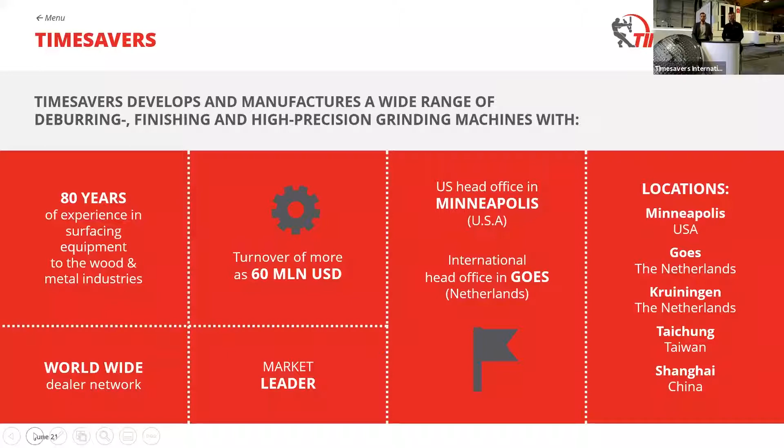A turnover of about 60 million US dollars with our head office in Minneapolis. Our international head office, which I'm responsible for, is in Goes. We have locations in Minneapolis, in Goes in the Netherlands, in Kruiningen, where this machine is built. We build all our special machines in a separate location. In Taichung in Taiwan, and we have a sales office in Shanghai. We work with a worldwide dealer network, and we are the market leader in the total range of deburring, finishing, and precision grinding.

Well, what makes Timesavers unique? We have a complete development and production in-house, a broad range of machines with many applications. We have passionate people, and you can see that over here. We are over here at our customer, so we think global, but we act local. Worldwide dealer network, and we can really build for the customer need. So here you see our network, where we are more or less. If you look at Goes on the world map, Rijssen is, I think, close by.

But Van Geenen. Yeah, we started in 1977. My dad started together with my granddad, and now I'm here. I took it over 5-6 years back. I've already been working here for 10 years. We try to do the things we do better every day. We develop our employees, our machines. During the years, we expanded in the square meters we have now, in new machines, and we have approximately 35 employees.

We started in 1977 with the traditional way of polishing and grinding with hand machines. And during the years, we expanded more into machines with wide belt grinding machines. One of the first machines was a Timesavers, and we bought and developed techniques and long belt grinding machines, polishing machines. So we can polish sheets in diverse levels from mirror 7 to mirror 8 and 9, 10. It's something we developed ourselves.

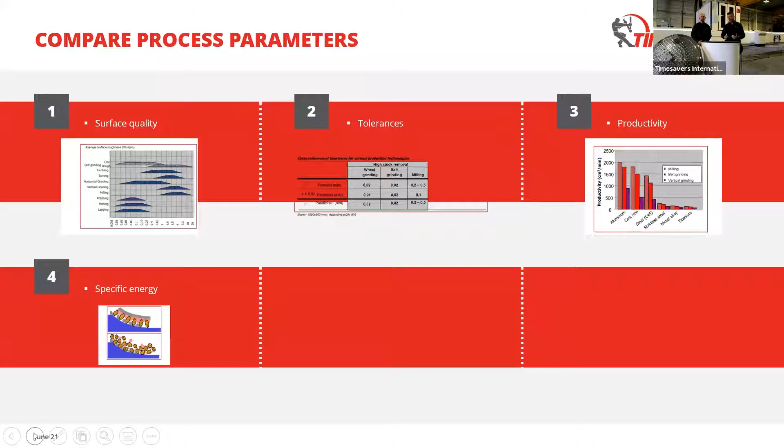Yeah, so like I said, we have milling, grinding, stone grinding, and we will do a comparison now. So that is what we want to show you. Where does a wide belt grinder fit in this area of the milling and the stone grinding? So what process parameters will we compare? We will look at surface quality, tolerances, productivity, and specific energy. I will talk you through it, and later on, when we talk a little bit more in detail, Pascal will join in. So don't worry, you don't have to listen to me all the time.

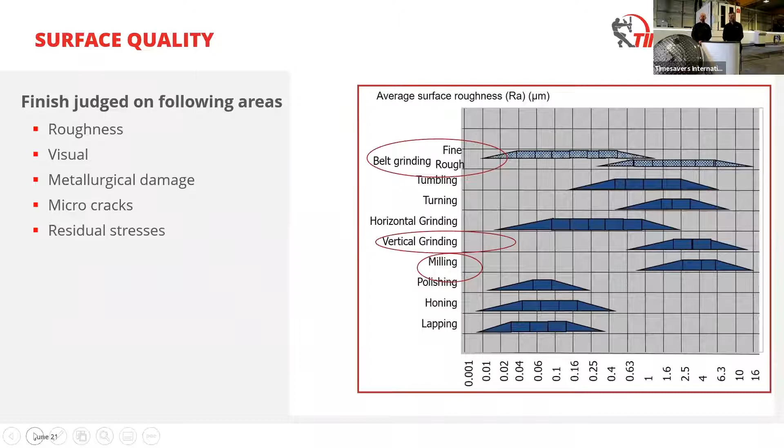So if you see over here, we have the roughness, the visual, metallurgic damage, micro cracks, and residual stresses. That is quite important in our machine. We have a cold process. What you see with the belt grinding, the rough grinding, we will be somewhere with a roughness value up to 0.6. But if we do fine grinding, we can reach lower roughness values. Pascal and I did it a couple of weeks ago with one customer. We had a roughness value of 0.04, 0.05. Still doable with the grinding belt.

If you compare that to vertical grinding, you see that roughness is around 1, and milling is also a roughness around 1. The other disadvantage of milling is that if you have a big mill, you always go under an angle, so you will lose your tolerance, and we will see that a little bit later on.

So here you see the tolerances. Well, wheel grinding, I think everybody knows that is the most accurate way of doing it. Not always necessary, but wheel grinding gets the most accurate one. If you look at milling, you will have a tolerance of about 0.1, and you also bring a lot of stress into the material. If you look at our wide belt grinder, we will have a tolerance of about plus or minus 0.02. It depends a little bit on your starting point and your material, but that's the same, of course, with wheel grinding.

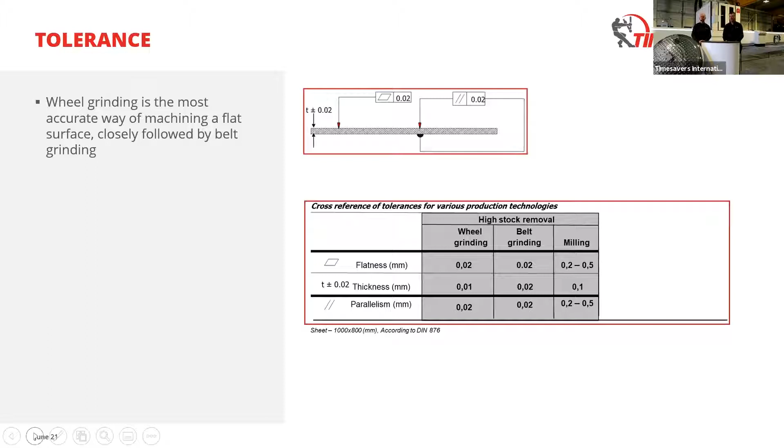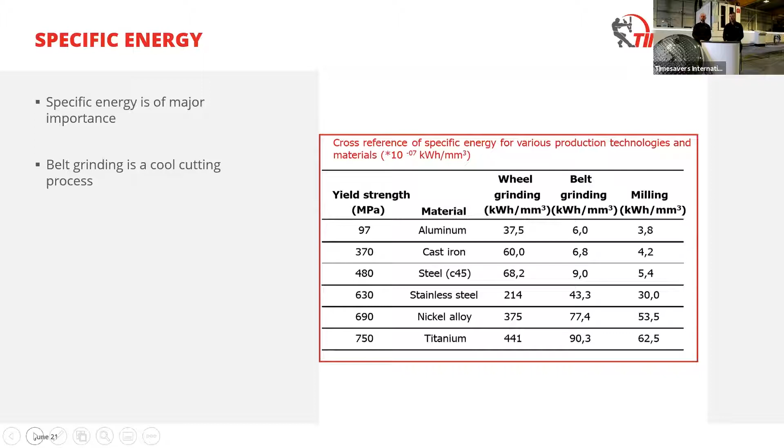And the final one in the technical part is specific energy. How much energy do you need to remove 1 cubic millimeter of material? If you look at wheel grinding, later on we will show you why. For instance, if you take titanium, you need 441 kilowatt hours to remove 1 cubic millimeter. If you compare that to a wide belt grinder, we are only at 90, where milling is still a little bit lower, and it all has to do with this area over here. It has to do with the chip chamber.

In a wide belt, the abrasive gets a cutting angle. It's really glued onto the paper under an angle. Whereas with a stone grinder, it's basically built like your grandmother making a cake. These abrasives are in all kinds of different orientations, and you don't have a cutting angle. Also, the chip chamber is a lot smaller, so you make smaller chips. You will have some rubbing over the material, so then you have to put it under an angle, and then you think you have a good tolerance, but still you will lose the tolerance again.

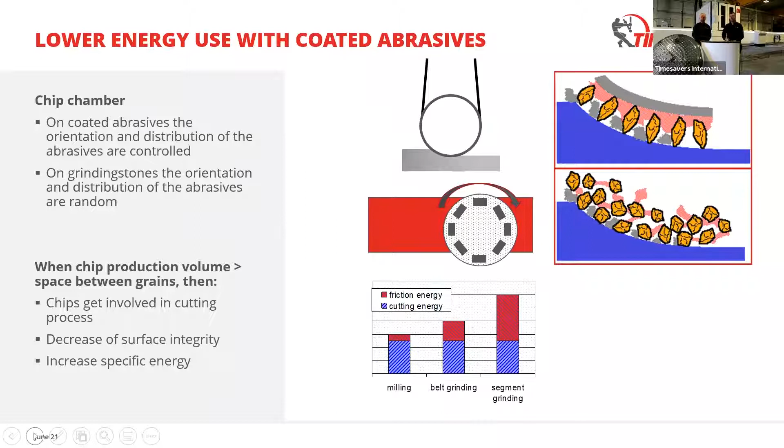Actually, if you really want to test this on your material, don't worry about that. Send the material to us. We have not only one over here at Van Geenen, where you can really do production, but we also have one in our lab.

Pascal, so, I had enough of it.

Finally, we beat it. So the advantage of the wide belt grinding machine, as stated, you can quickly change from materials, from fine to coarse and coarse to fine. Long lifetime of the belts. It gets cheaper on a wider machine, as here at Van Geenen, 2 meters wide.

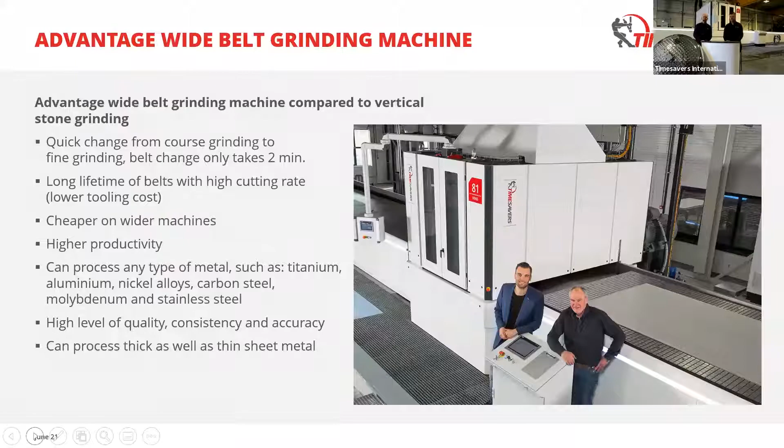You have a high productivity, and of course you can process all mixed materials as discussed before. Quality, consistency, and accuracy are of high level. And of course you can process thick and thin sheet material. So our 81 series. This is the most innovative solution for precision grinding and calibrating that we have, and I think that also in the market.

Just a few customer segments. Well, of course it's very diverse, but aerospace, screen production, machine components, but also sheet and press plates in a wide range. Yes, but also architectural areas where you want to make a very nice finish. Yes. It's all kind of ways possible.

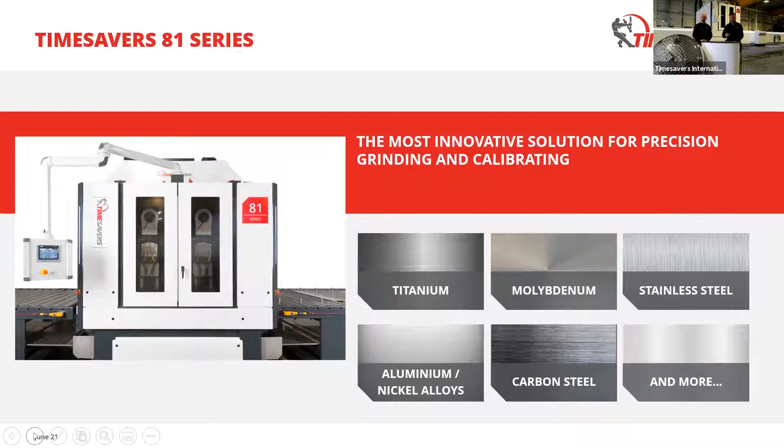So what makes the 81 series, as we are sitting in front of, unique? So we can have very narrow but also very wide working machines. The accuracy of precision grinding up to 2 hundredths of a millimeter. The grinding belt runs clockwise or counterclockwise. It depends. Yes. Quick exchange of the abrasive belts. If you have time, maybe we can show it during the live demo. Yes, if somebody wants to see it, if you have no knowledge about that, well, of course we can show that.

Yeah. LED operation indication. So you can see the status of your machine from a distance.

Normal people can. You cannot. Shh, don't tell. Pascal is a little bit colorblind, so he cannot see it.

But it's very nice for chief of the production. He walks through the factory, he can immediately see if the machine is running, yes or no. When it's red, of course you have an alarm. When it's green, the machine is running. Everybody wants to see that. When it's blue, waiting for the material, changing materials. So this LED operation is very nice.

Grinding belt optimization to maximize your grinding belt life. Of course, the grinding belts is one of the highest cost of use of your machine. It's integrated in the machine. Yeah, so the machine basically helps the operator to get the maximum use out of the belt. So if your belt pressure is not high enough, then the machine automatically will set for a higher pressure. When the pressure is too high, then actually the pressure will be reduced. So the machine is helping in the process.

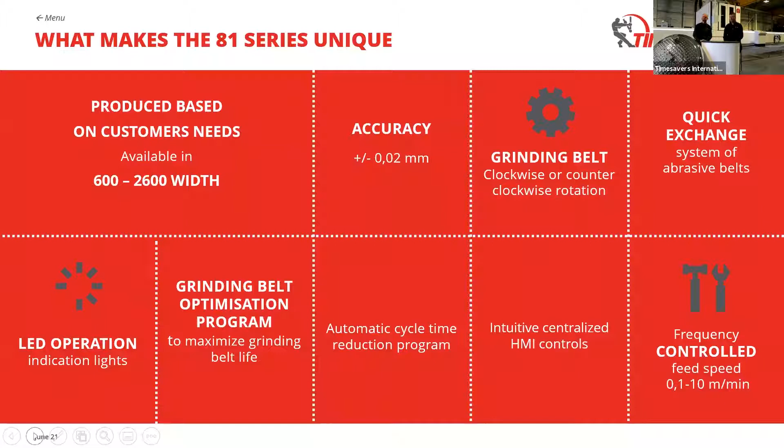So we have them in different executions. The first two you see the most. So we have a single head grinding belt, a wide belt grinding belt. You can have a two head, so you're twice as quick, or you have two belts on the machine that you do some rough grinding before, then you do a finer belt.

A brush, we have built that. You don't see that a lot in this area, but some people want to get a very nice finish, a very fine finish with the brushes. You can actually do a one and a two head brush machine as well.

Well, different shapes can be grinded, taper, U-shape, and of course flat, which makes sense. So even people that want to do a taper or a U-shape, you can actually do that in this machine. We can program that in there, and we can make it flexible for you so that you can do that.

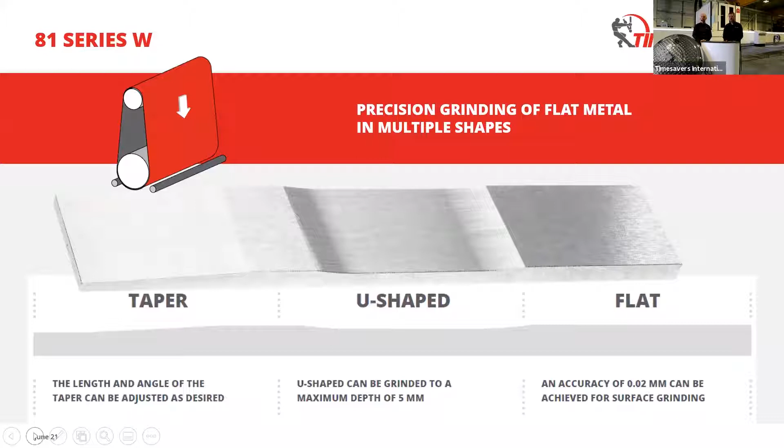Well, like the machine at Van Geenen, WW, we say 2 grinding belts after each other for finer finish, and you can start at a rough grinding belt and finish it with a finer belt in one pass. Yeah, what we see a lot is that people use one belt to really remove the material and use the second belt to do the fine finish.

You don't have to change belts then in the meantime. It's quick, but still it takes time. It's much quicker, of course, to have 2 belts on the machine. Yep. Well, as stated, brushes, not so common, but for a perfect finish, we say.

And a double brush for an even faster, perfect, finer finish. Oh yes, that's great. Fantastic.

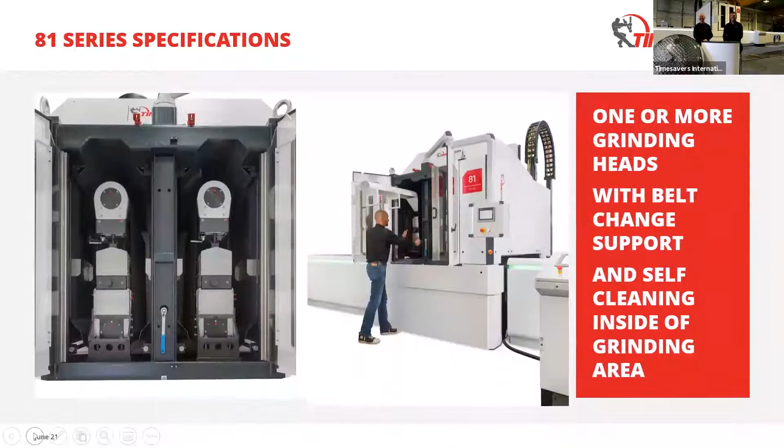So, one or more grinding heads here. You can see somebody here changing a grinding belt.

Self-cleaning is one of the main issues with a machine like this, since it's a wet working machine. If it's not clean and you leave it over the weekend, the swarf in the corners will basically turn like concrete, so you cannot keep it clean anymore.

We also sell a lot of dry working machines. It doesn't matter so much whether you clean them or not. If you clean them after half a year, you still can. Forget that with a wet working machine.

So in our design, we try to do as much as possible to keep it clean on the inside, so the operator doesn't have to clean it all the time.

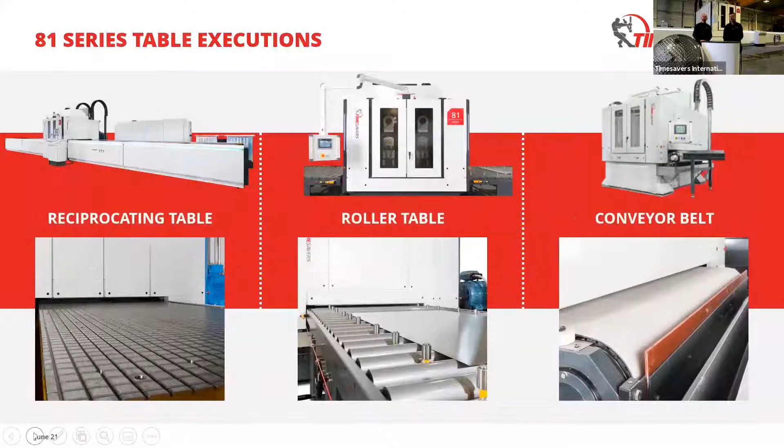Different table executions - as you can see, the machine at Van Geenen has a reciprocating table. It's moving back and forth for really precision grinding. We can also do the roller table version for thin sheet or coil material, and we have the conveyor belt for thicker material in common.

So basically we will help you with the choice there. We have people that do stainless steel and only want to do some finishing - we will advise them to use the conveyor belt, especially on hot rolled material.

If you do thin sheets - and thin sheets I mean up till 5-6 millimeters, the machine can do up till 12, but then your material has to be perfectly flat - but up till 5-6 millimeters, then you take the roller table.

We see this used in the titanium industry, where they use a lot of sheets, most of the time only up till 2 millimeters. Then you take a roller table, and then the reciprocating table, you get the best accuracy of all the machines.

Well, actually this is a summary of what you have just told, Peter. Yeah, thank you very much.

So here we have that with the conveyor belt. You see that the speed goes a little bit quicker. Some people want to go 20 meters per minute because they only want to make a quick scratch on the surface if they take some cold rolled material.

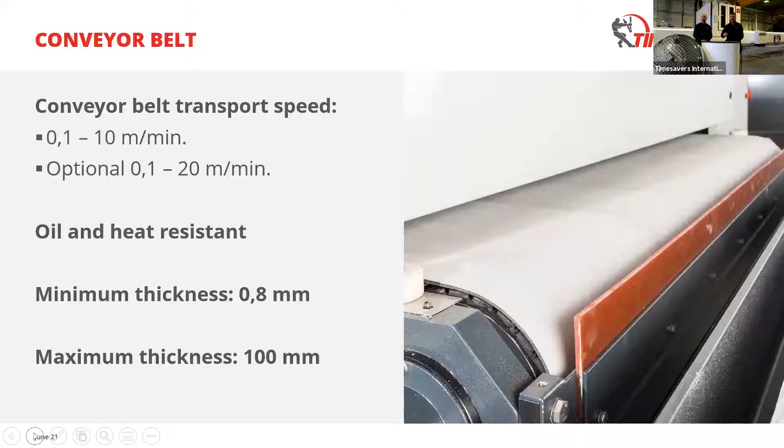We have a video over here that we want to show you, and that is a machine with a conveyor belt.

We have sold this machine to Canada, to a customer that we have had for a long time already. Actually, he bought his machine second hand in 2003-2004, and now he decided on a completely new machine, 1600 millimeters wide.

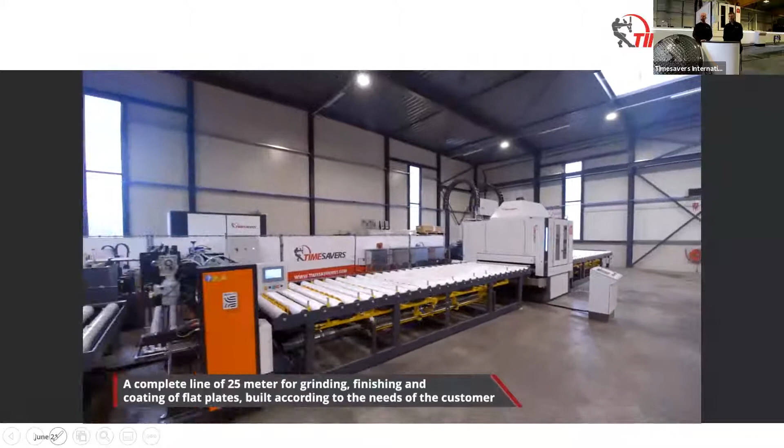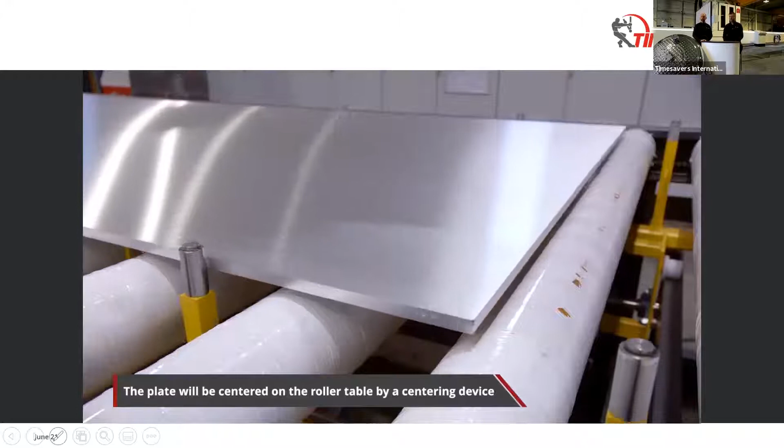And this machine has a conveyor belt. I mean, we can show you, of course, a machine that we have with a reciprocating table, but we rather do that live over here because we are live over here.

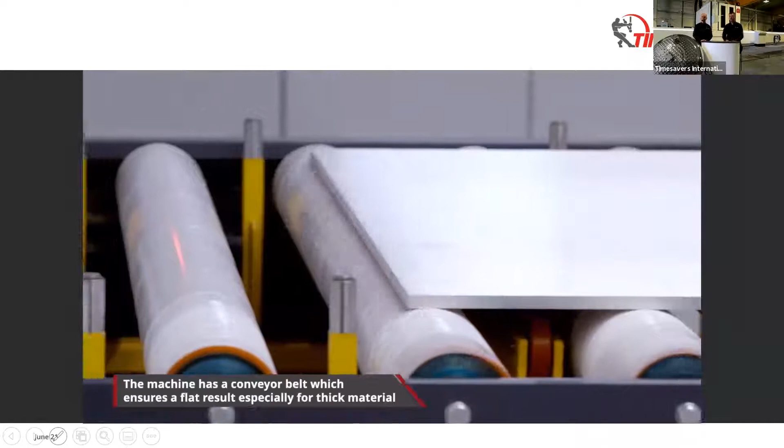So we have some table in the front over here, automatic centering. Also this sheet that we have in there, the machine will reciprocate backwards and forwards if you do a hot rolled material - in this case it was a piece of aluminium. But if you have hot rolled material, you can reciprocate backwards and forwards, multiple passes, more and more stock removal, with the same belt optimization program.

We also have an air knife inside, one to keep the coolant and the fog inside, and on the other hand to also dry a little bit the surface of the material.

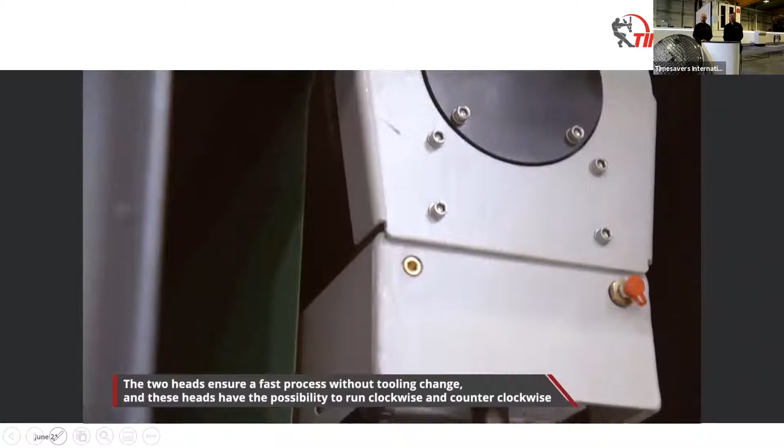We actually just recently sold one into Poland to the company BTH. They have also a machine like this, but a 2-meter-wide version - also a long-lasting customer.

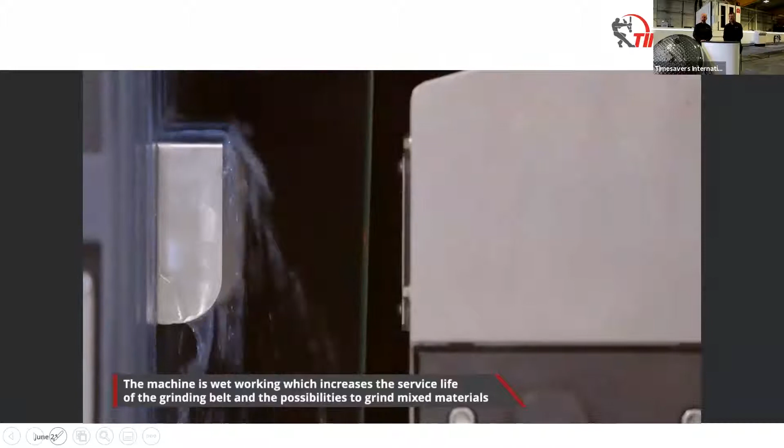And as you can see, the handling is integrated as well, with an in-between transport table.

So here you see that we do the multiple cycle thing - we go backwards and forwards.

Accuracy is less than what we can do over here on the machine, and then we can do some PVC coating.

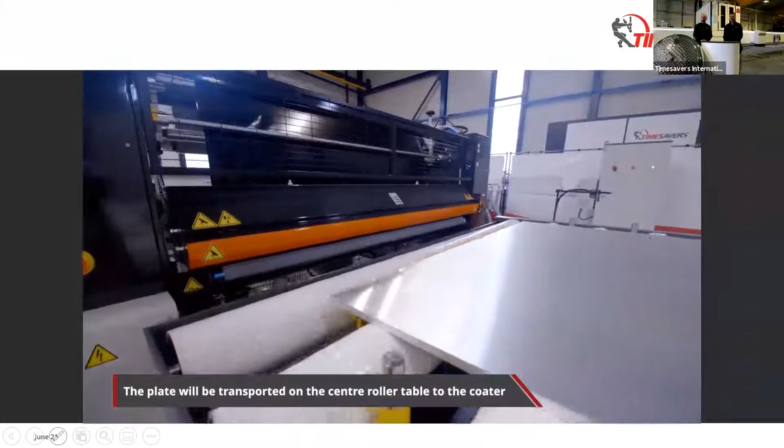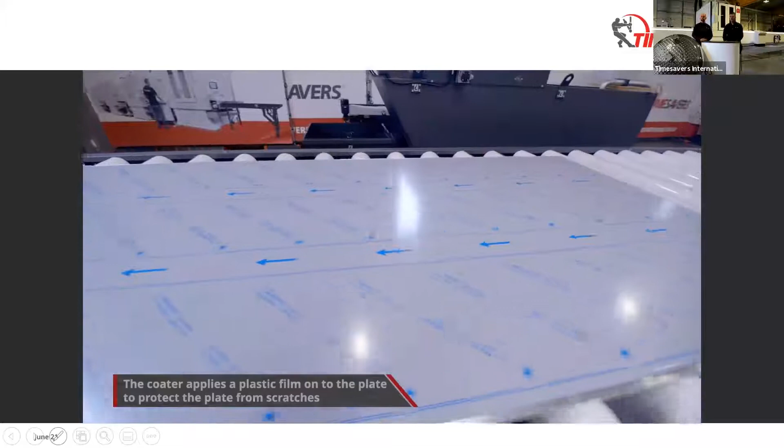If you say this is interesting for me, but my volume is not big enough, you can phone Van Geenen, and Van Geenen can do sheet material as well. You saw that in the beginning. If you have any questions about that, shoot an email to Bart later on, and he can tell you what he can and what he cannot do.

Here you see the connection for the main motor. Screen, we have a desk over here. We also have that over here at Van Geenen, a desk control. You can also choose for an arm, a swing arm.

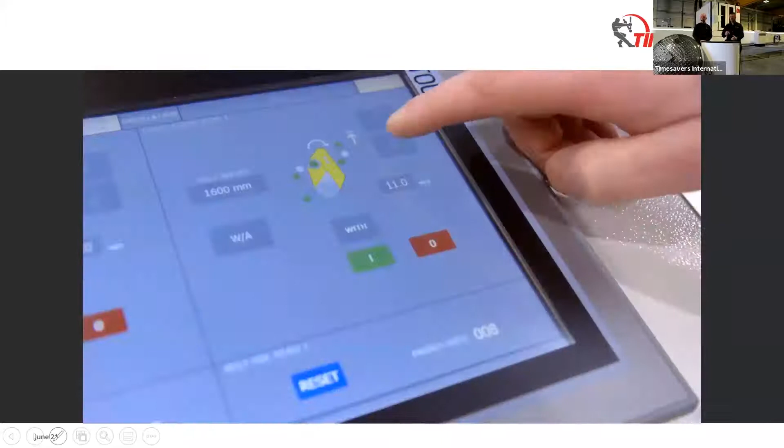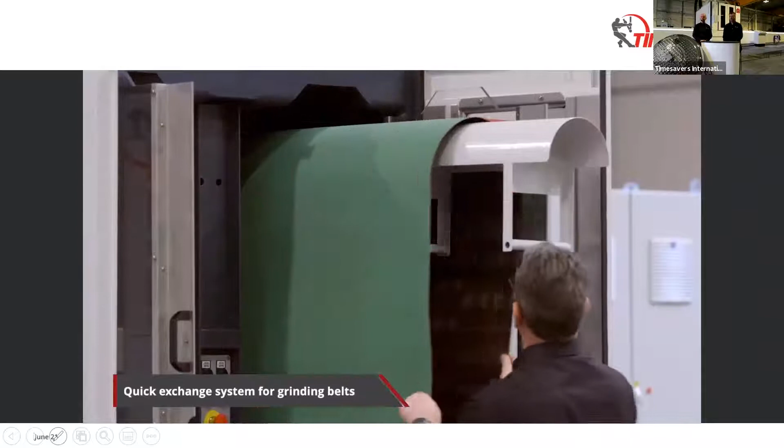Actually, we don't have to show live because we do the grinding belt change over here. On the movie it's a little bit quicker, but it takes you more or less 2 minutes, I would say, on a 1600 wide machine. The wider they become, the more difficult it becomes. But it's nothing compared to if you have a stone grinder where you are hours working.

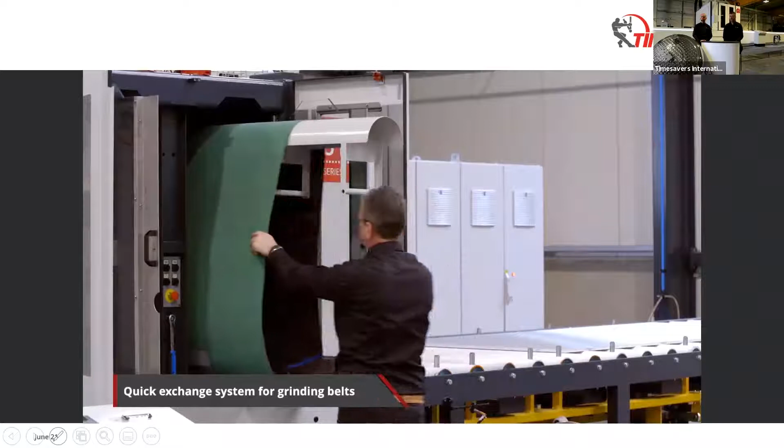Ricardo, our colleague, doing a perfect job over here. We miss him over here today.

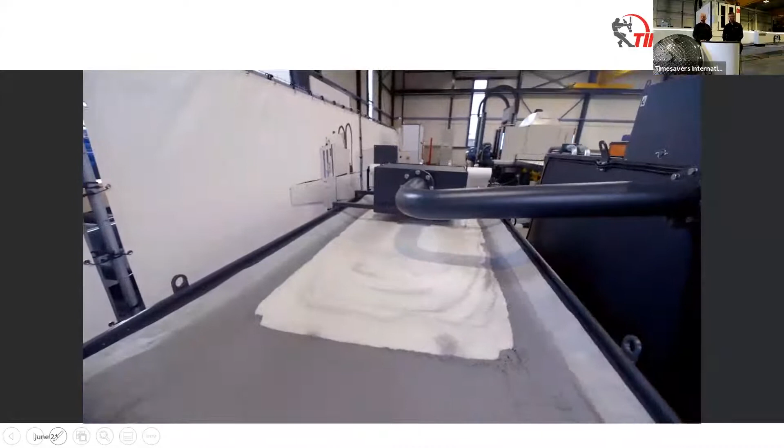Job done. And a filter system. Of course you need a filter system for a wet working machine. If you have a dry working machine, you need a dust extraction system. This was still in our factory, so it doesn't look as nice as what we have over here at Van Geenen.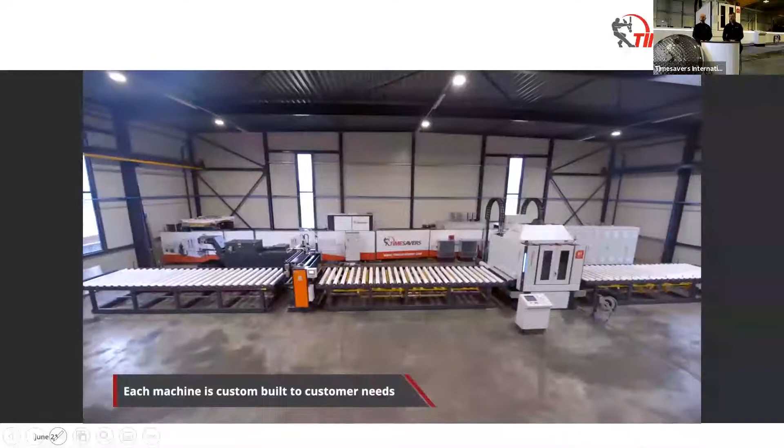But it gives you a very good idea of how it looks. And like we said, we built them to customer needs. This line had a length of about, well, the tables were 6 meters long, and 20, 25 meters more or less. That's what it is.

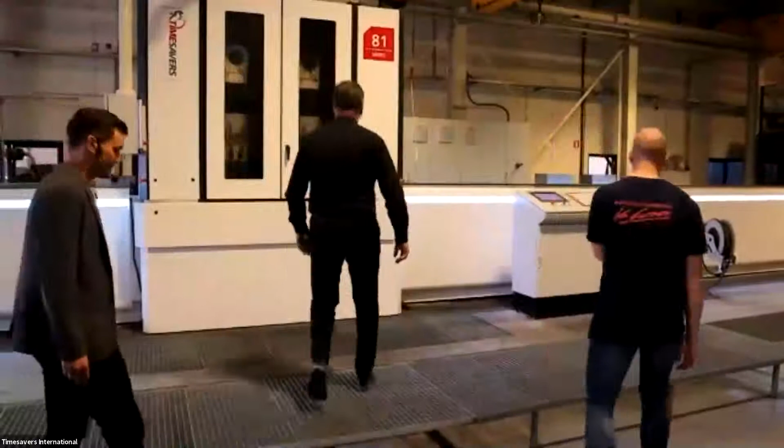Okay, but we walk to the machine. We have 2 colleagues over here, Emil and Wouter. They will join us. Wouter is from Van Geenen, and Emil is joining us as well. So we first show the machine, then we will explain a little bit more over here.

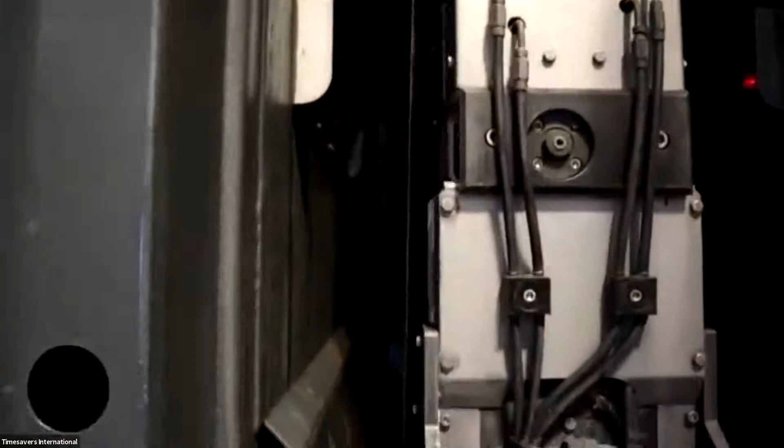So like you could see already before, these are the 2 grinding heads. Machine made by Van Geenen, 2 grinding heads, 2.1 meter wide, and a wet working system. You can see that the people use the machine, but it still remains quite clean. If you look over the table, maybe that's a good view that we have.

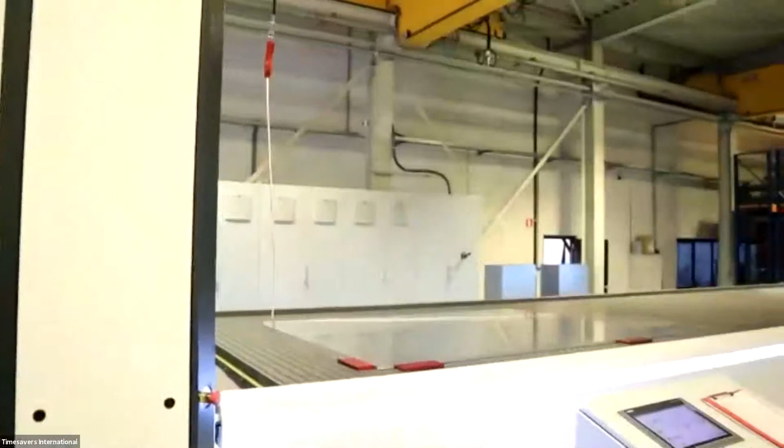We have Peter behind the cameras over here, give it a view over the table. We have an 8.5 meter long table over here, so if you want to do a really big sheet, you can do that.

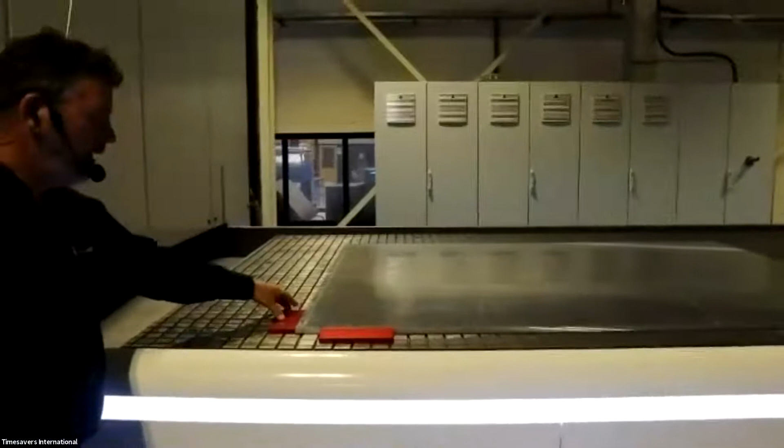So we have both Wouter and Emil here. Emil is doing the demonstrations in our factory. If you look over here, we have a piece of aluminium that we will process. We have some stops over here. It makes it easier to put the plates on the machine.

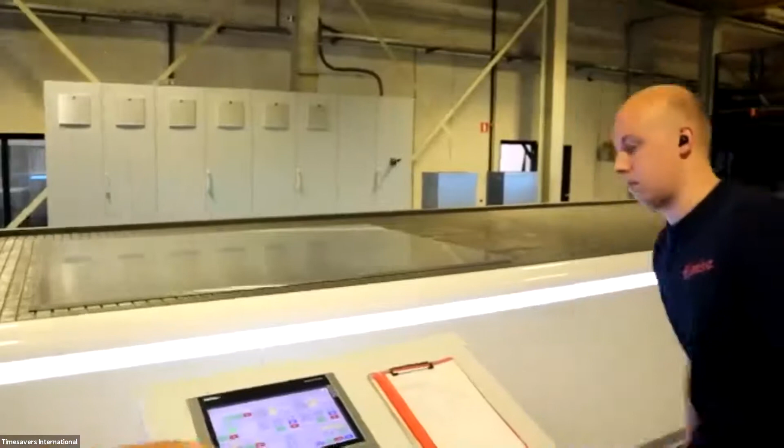So we can take them away. Here you go. You can start up the vacuum. In the meantime, maybe it's good to show over here. We still have a sheet over here on the floor. Maybe Bud can help us out a little bit over here. So here we have a sheet on the floor, the starting point. This is how the sheet starts.

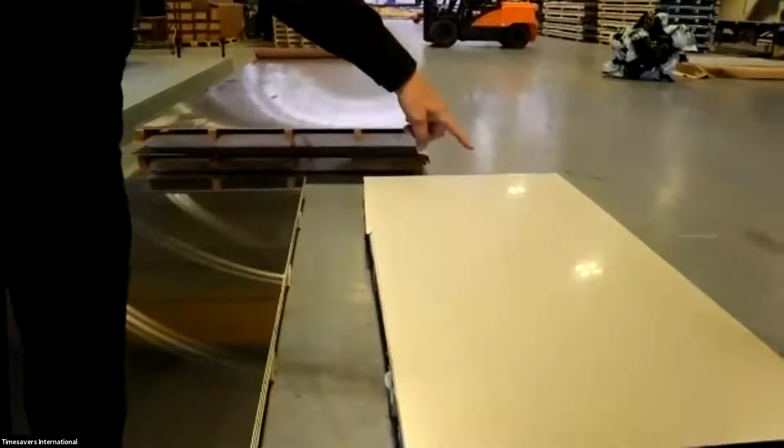Here you see a cold rolled sheet, but of course the machine can process all types of sheets. It's very good at hot rolled and 1D material. But to show you the difference, we start with, of course...

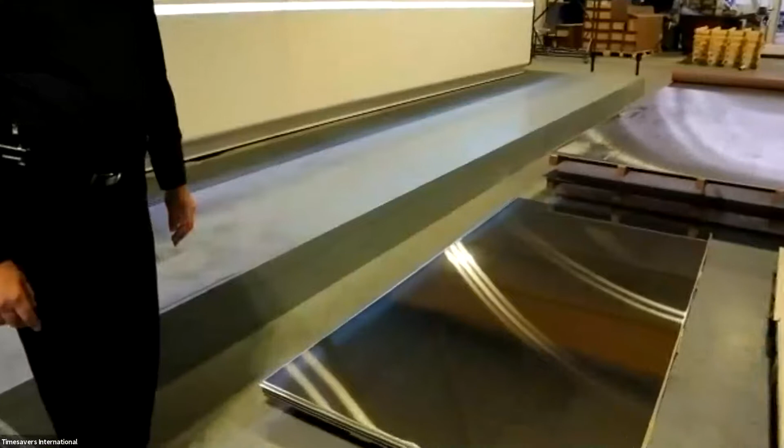A mill surface, and what we can do is, of course, do a normal grind finish to make it look good. But we also can guarantee a demanded flatness or a certain thickness that has to be in a min and plus range. In this case, we only use grinding belts with the machine. It's a grinding machine, but as you can see, it's already a bit shiny, on a bright anneal level, and that's for technical application - not always necessary, but it's approximately an Ra value of 0.1, and that's a very good situation to go along with polishing later.

So basically the idea, Bart, is that you take the 2B, then you do the pre-grinding over here, get the RA value to 0.1, and then you bring it over to your polishing machine, and we go to 0.05 or 2. So in the last step we need a polishing machine, but the preparation to go polishing is the most important part and the most time-taking part.

Time-consuming, that's why we call it a time saver, but there is a reason why we do this. It was not the first thing for why we bought this machine, but it's a good addition while we save a lot of time on our other machines, which we can use for other projects.

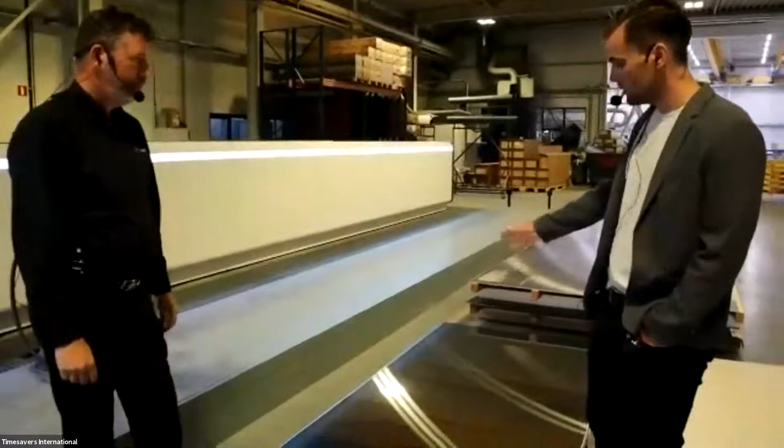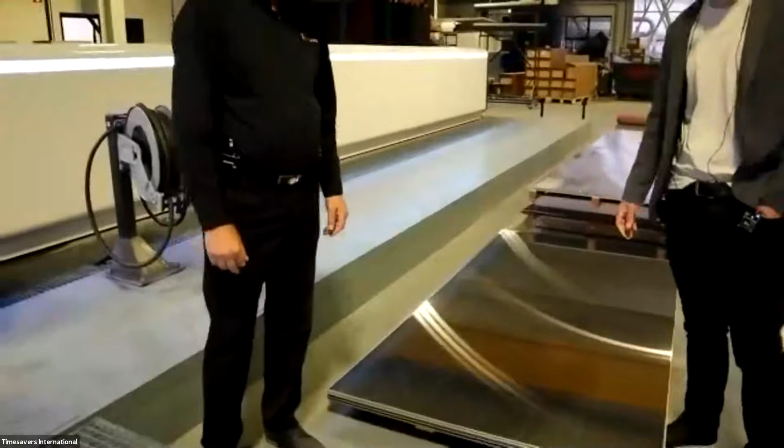Aesthetically it's good, already a bit shiny, a low RA value, and very flat. And when I need a thickness the customer wants, also not a problem. And no pitting - you remove all the pits. You see it's very smooth, no scratches or material issues, flawless. So that combination is very, very good.

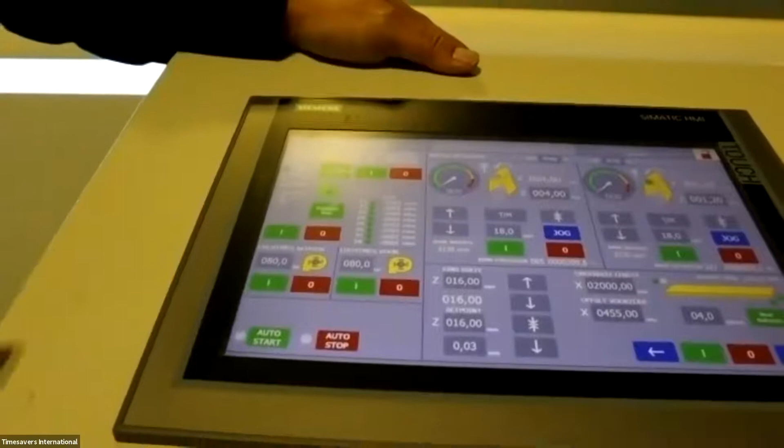Okay, well thank you very much, Bart. We go back to the machine and then we look at the screen. So Peter, if you want to join me, we have the main screen over here. It looks complicated, actually it isn't. Wouter mentioned that already in the video we had before - we can teach somebody from zero to grinding in 3 days. Then he is not the biggest specialist in the world, but he can use the machine already 80-90%.

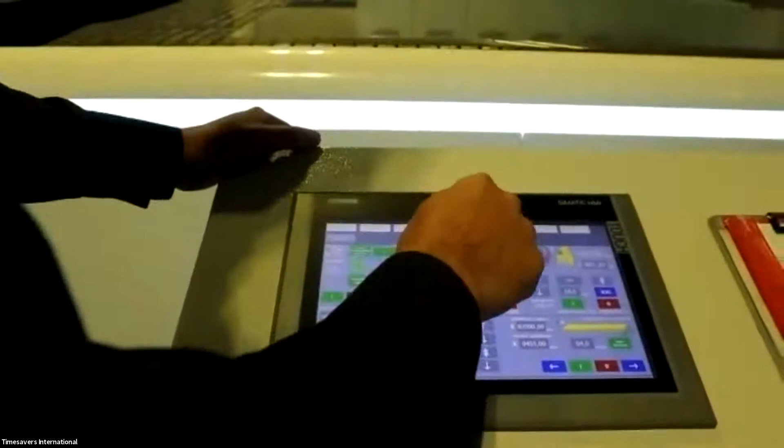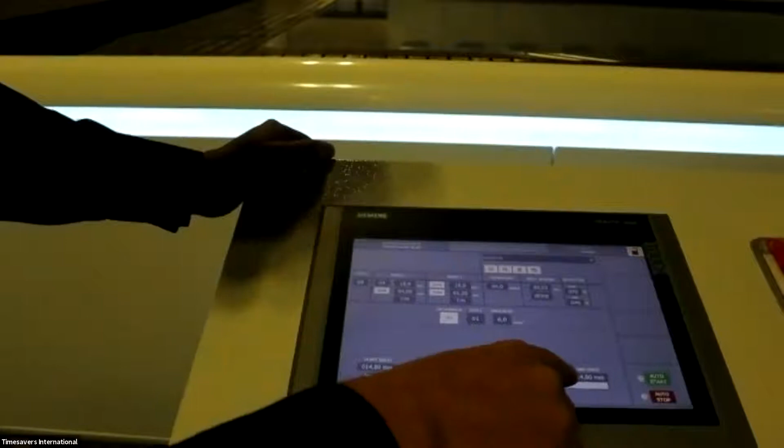So here this is a manual screen. We made the program, so the program is prepared over here. And what we actually will do, we will have a starting thickness of 14.8 and we will go to 14.0, and that is what we want to show you.

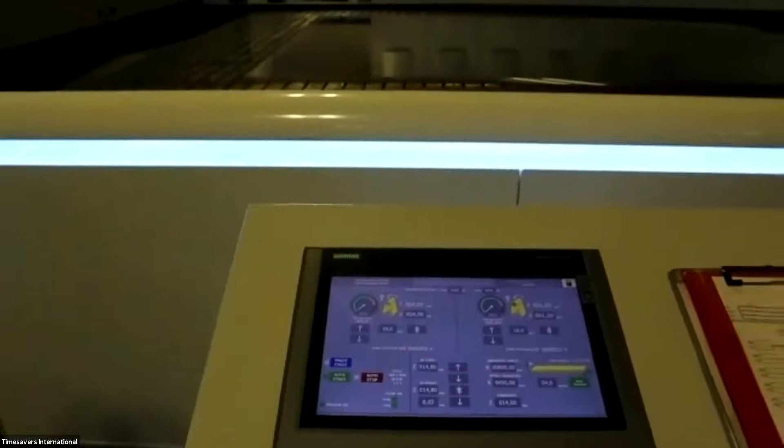Let me see, the vacuum is on. Yes. And then we do the auto start function. And there we go, and now we can see it live. Oh, and you can see the lights also, yeah, sorry. Yes, now it's working, now it's working.

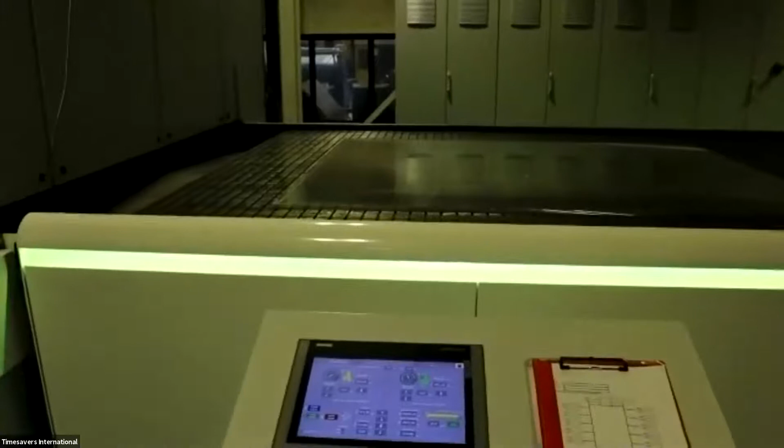So what you basically see now, what we will do, we will only do half the plate. We will not do the full plate, so that you can see that we are really removing material. If we do the full sheet, then it's pretty useless. We will remove every step that we go in and that we go out - we will remove 12 hundredths of a millimeter.

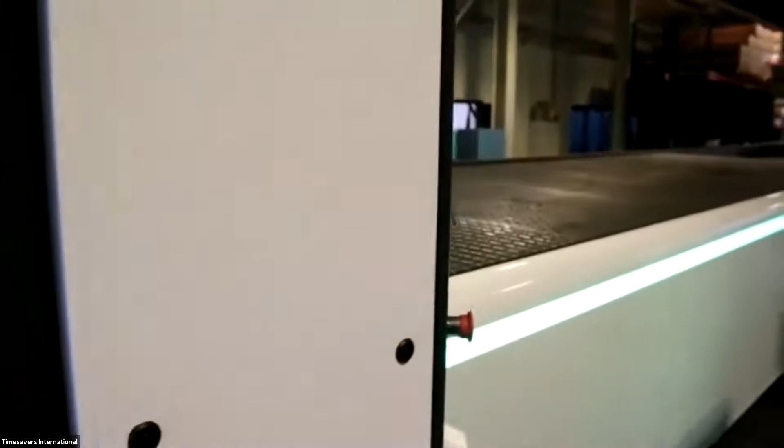And it's coming out already. So you can see that we did already something over here. We use a grit 60 over here to remove the material. Afterwards, of course, you can put some finer belts on there to make it a finer finish.

It's now only waiting until the process is done, and of course that will take a few minutes. I don't know if there are already questions. Oh yeah, we have a question over here: how do we know that 0.12 was removed?

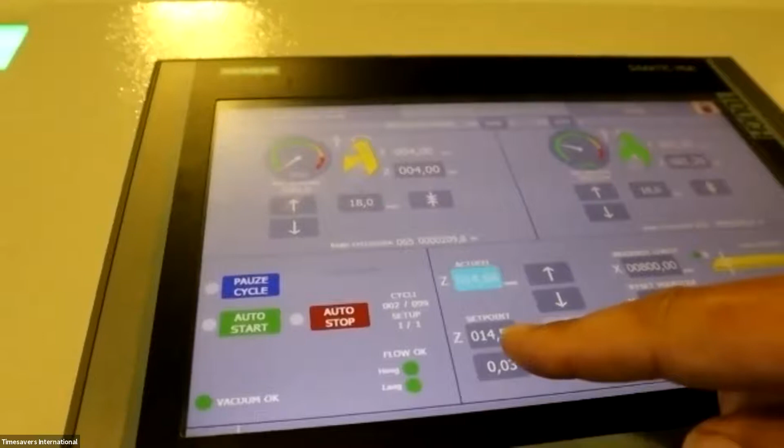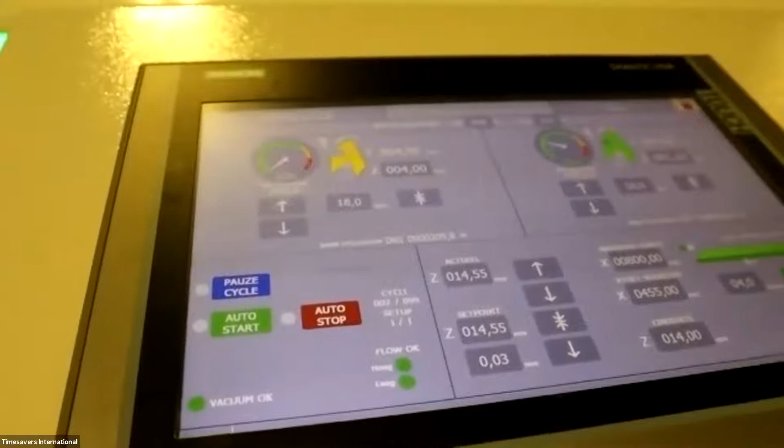Okay, maybe it's good to have the camera look over here. If you are quick, then I hope you can see the screen. So the set point is 14.62. You see it going out, and then you will actually close the table. So we will go to a set point - we have 14.55 now. We are doing actually 6 hundredths per pass, so per cycle we do 12. Yes, that's it, and then we can go back. So the screen is basically telling you your start thickness and your end thickness, that's how we do the steps.

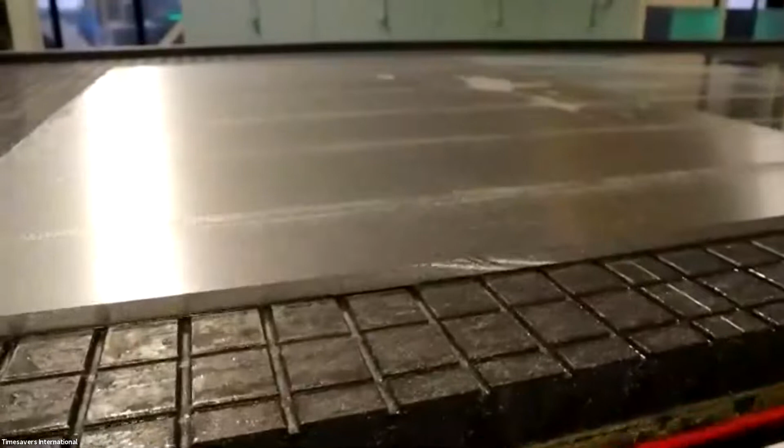So step by step we are removing. So we are now at 14.49. And now we go back to 14.43, so 6 hundredths every pass that we do. And you actually see now the removal rate that we are doing.

And yes, of course on aluminium that's a little bit easier than what you can do on stainless steel or on titanium. But on a titanium sheet you normally have to remove somewhere between 1.5 and 3 millimeters, so it takes a little bit of time. Tooling is important, of course, we can show that later on. Van Geenen has a lot of different grinding belts over here, and that's what you need to have. It's also a little bit of experience that you will get over time. Of course, some belt suppliers can help you with that.

And I think we do one more cycle and then we are done. You can see that we already removed quite some material. We are running at this moment 4 meters per minute transport speed. You can imagine if you have a sheet of 8 meters, it takes 2 minutes. But there is no other way of doing it.

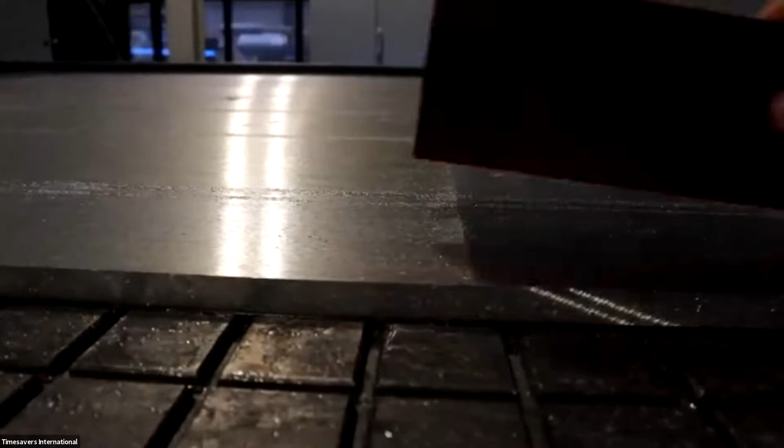So here you can see we removed 0.5 millimeter of aluminium at the time you were looking at it. I mean, this is a matter of minutes. Okay. Peter, thank you very much.

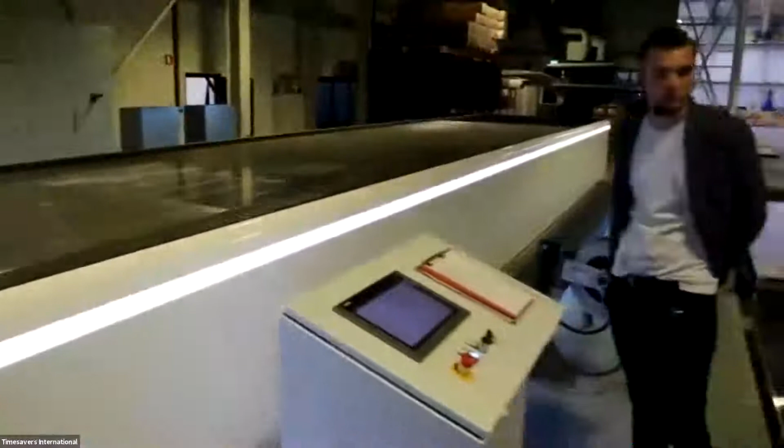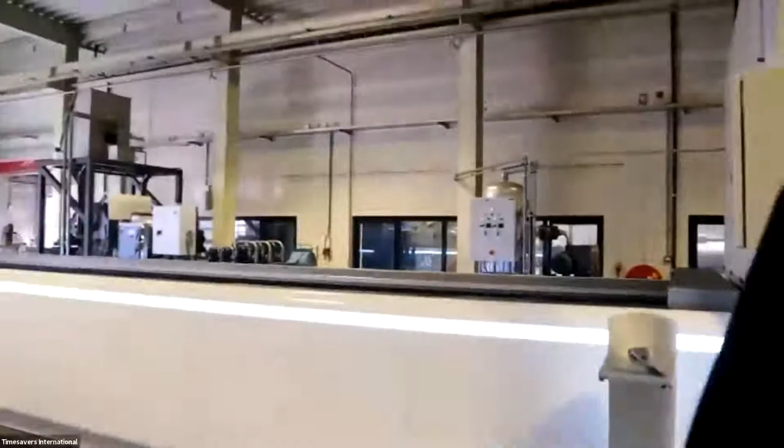So let's go back. We can give a glance over the machine. We said we did this side already. Over there we have the filter installation on the other side. We have the vacuum system, of course. We have over here. It's a beautiful setup. Okay, let's see if you have questions.

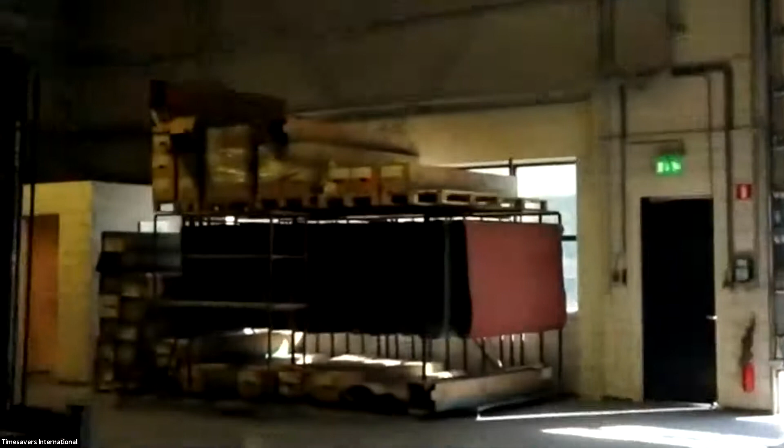Oh, the grinding belts. You want to show the grinding belts? So we will give you an idea of the different type of grinding belts. If you see that in the distance over there, you see all the belts hanging out. So there's all kind of different belts. This is the best way to keep your belts so that they hang out. Then it's much easier to put them on the machine. Okay, we go to the table and see if you have some questions, Bart. Then we can go through that one.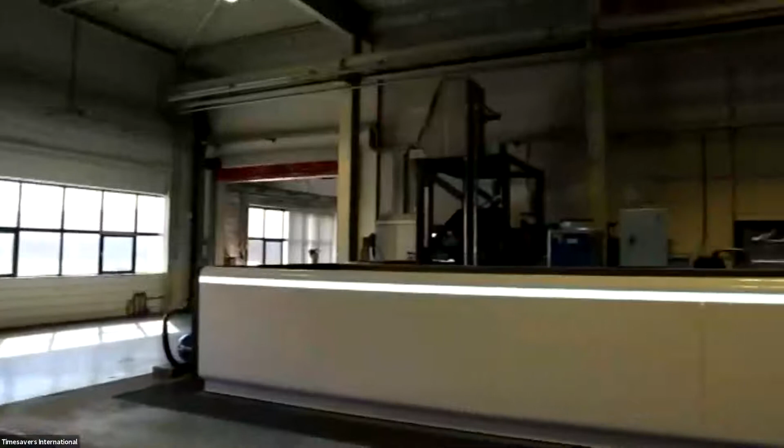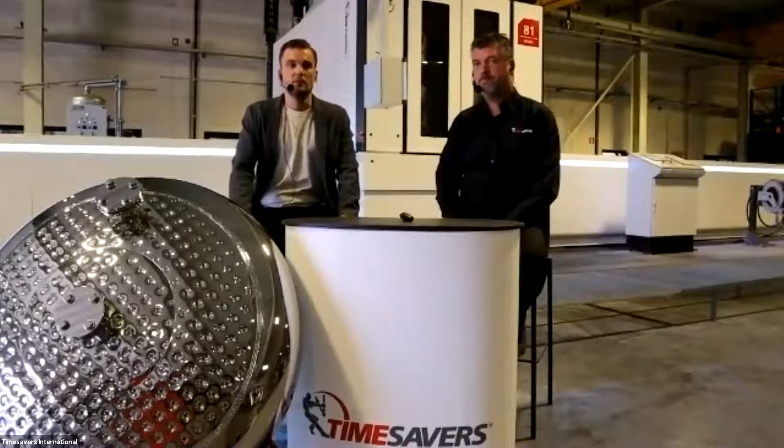Oh, kind of materials. So we explained already what the machine can do, but in types of material, what is your focus there? I mean, you do a lot of stainless steel over here. Will you be able to do the titaniums, molybdenums, and things like that as well? Yes, we already had good solutions before we had this machine for working on stainless steel. And of course, it's good to go directly ahead with this machine with what we already have in-house, stainless steel sheets. So from day one, we can use this machine. But the focus area is the more exotic materials like titanium, molybdenum, or the types you already said.

But what's very interesting on this machine is that it's a wet process. And of course, as you may know, titanium is very flammable. You cannot grind or polish that on dry machines. The other machines we have here are all on a dry process. So actually, we needed a wet process to work on materials like titanium. And now we have it, and it's a very controlled system with a vacuum system which lays the sheet very tight and flat on the machine.

On the machine. Yes. And then with the wet grinding process, nothing dangerous can happen, and we reach a very nice and smooth finish with very good Ra values, very easy to reach. We don't have to use the machine on its maximum. It's very easy for the Timesavers to do that. Yeah, of course we have already a lot of experience in that field. I mean, mainly you want to go to an Ra that people will pass the bending test.

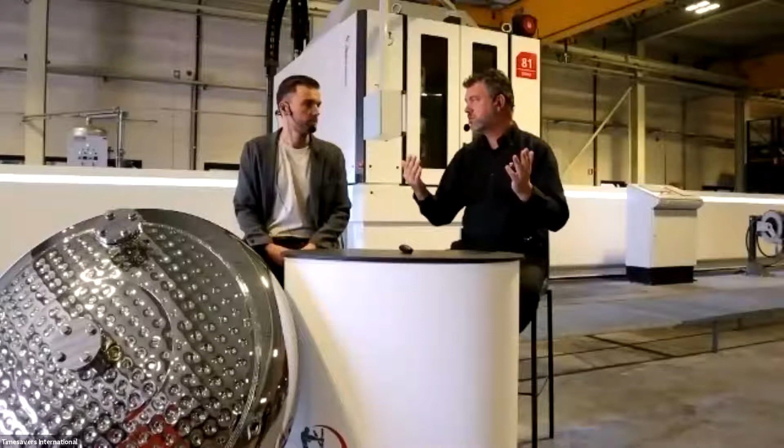Okay. One of the questions came about delivery time. What's your normal delivery scope? If somebody comes over here with a few sheets, what's your normal turnover in doing the processing? Our regular jobs, we do it in 1 week, 1.5 weeks. Yeah. But when we talk with the customers, if there is a lot of pressure or the customer needs it, we can always discuss it. Okay. Okay.

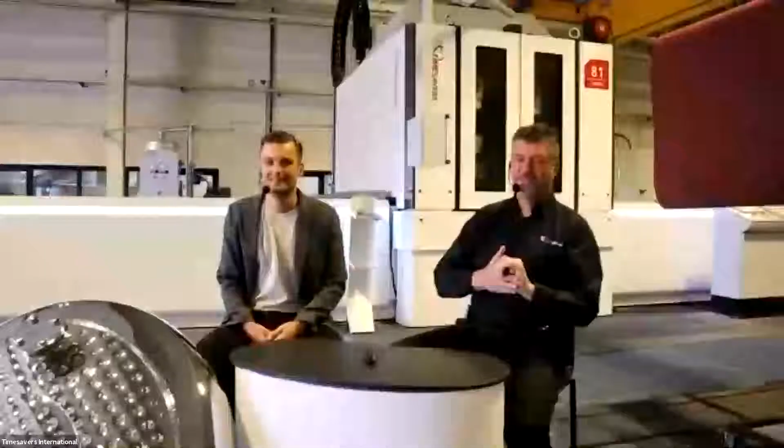Okay. The question is, can you show us how to change the belt live? Nobody believes Ricardo on the movie, so we will actually do that. Wouter will show that. So we pick up the camera, and then Wouter will show how to change the belt. So there we have Wouter.

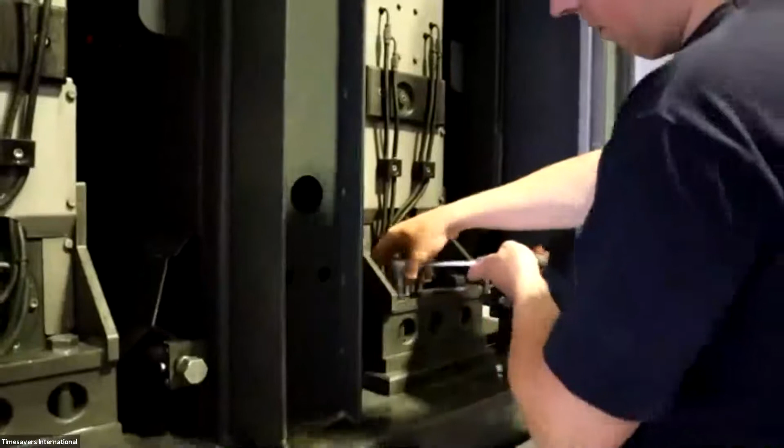So Peter, come in. We have, of course, a belt tension. The belt is tensioned on the top side. Peter, if you take the video on the top side. Okay, we push a button on the screen. It will go down. And then we loosen up the bolts on the bottom side. We remove the block. The block is there, of course, for the accuracy.

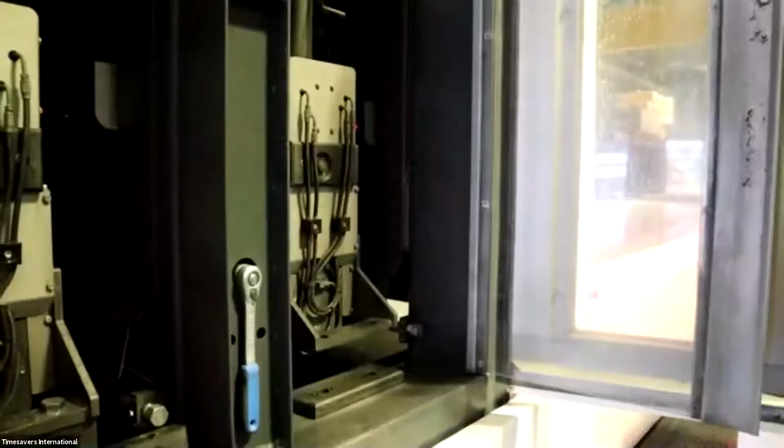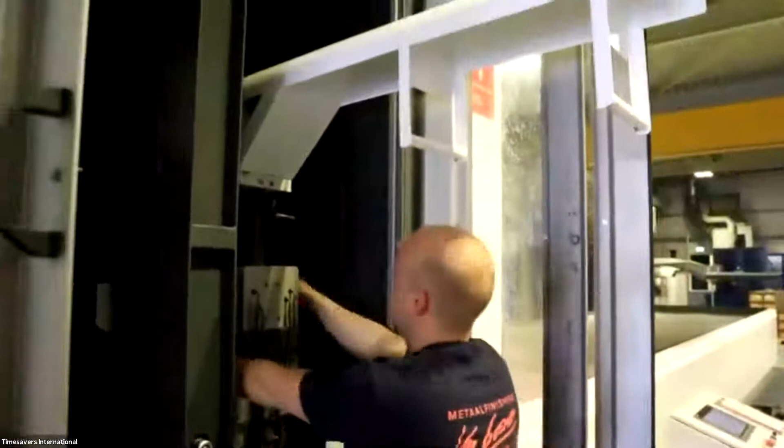On our standard machines, for people that looked already at more webinars from us, we have a quick release. These machines are just too heavy, so we cannot do that. So we have a change system over here. Okay, slide off the belt. Put it away.

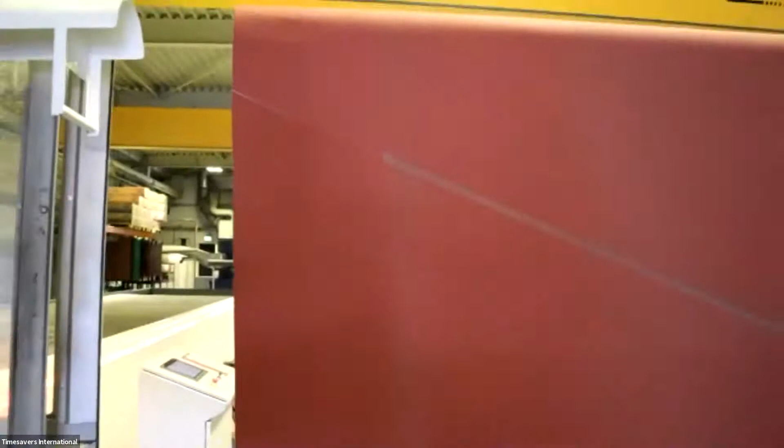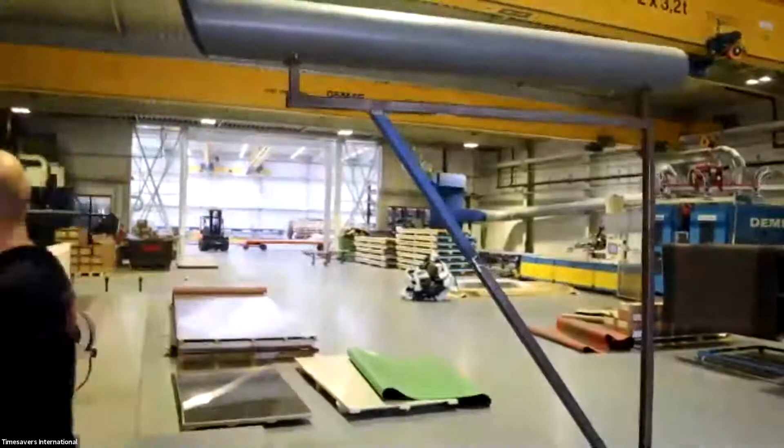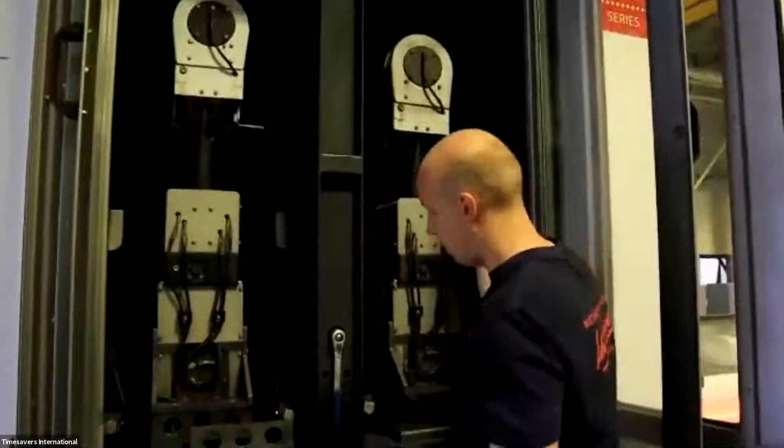They bring it now to the other side of the building, and that's quite a building, I would say. We put a new belt. I didn't see any stress so far from Wouter, so that's good. Brings it on there. You see the small help that I made over here at Van Geenen. And here you slide it in. Okay. Do the belt tension and we put the block back.

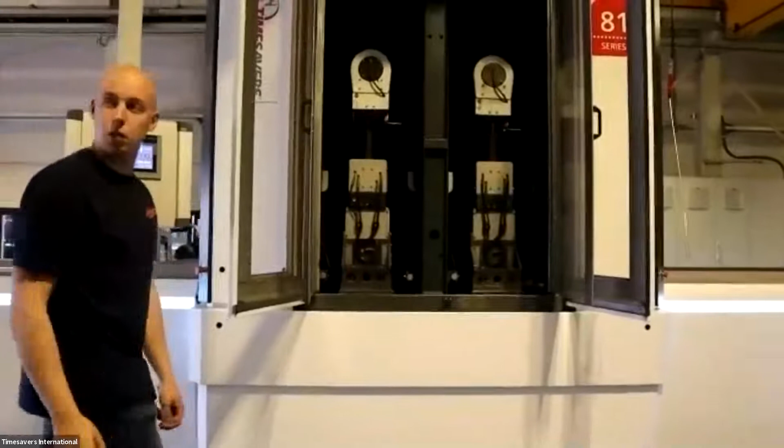Okay, and we are ready. So you see, yes, Ricardo is doing a good job. I think Wouter is doing a great job. So I think it's all fantastic.